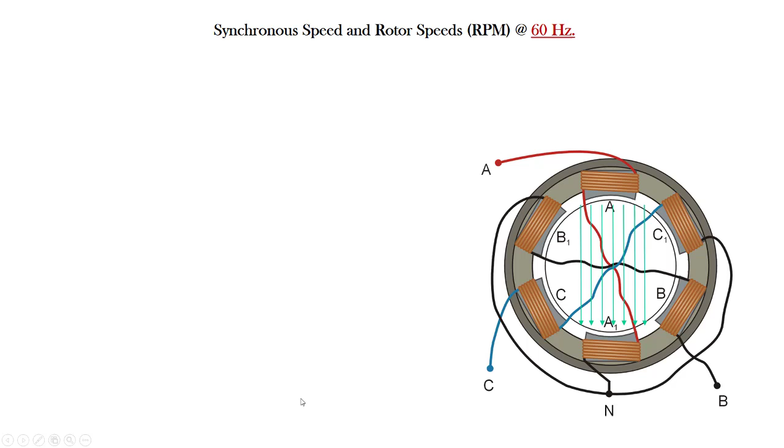The synchronous speed basically comes down to the speed of the rotating magnetic field. So here's a little picture of that. What's going on is that as each one of these phases is energized, and 120 degrees later, the next phase, it creates basically a rotating magnetic field. So we have this picture here drawn without the rotor.

So we can calculate the synchronous speed of a motor by taking the frequency of our supply, multiplying it by 120, and then we divide it by the number of poles. So that would be the formula to calculate synchronous speed. So let's just run through a few examples. So if we have a 60 hertz machine times 120, that's going to work out to 7,200, and we divide it by the number of poles.

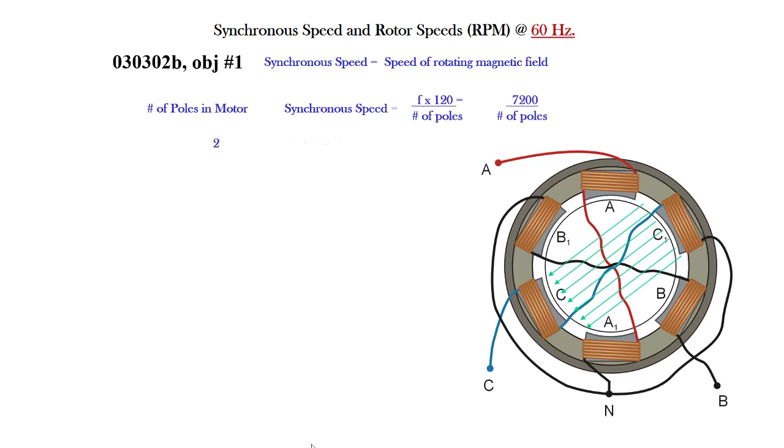So the number of poles of a motor always has to be an even number. So the lowest even number would be 2. So if we had a 2-pole motor operating at 60 hertz, we're looking at roughly 3,600 RPM. A 4-pole, its synchronous speed would be 1,800 RPM. 6-pole, 1,200. An 8-pole, 900. A 24-pole, 300 RPM. And what are some typical motor nameplate values for RPM?

So 1760, which would be a 4-pole machine. 3450, that would be a 2-pole machine. 850, that'd be an 8-pole machine. 1160, well, that would be a 6-pole. And 250 RPM would be a 24-pole. So we might see RPMs such as that on the nameplate.

So that's the full load speed of the motor, and when we see that, we'll know that it's a certain number of pole motor and it's going to have a certain synchronous speed. So for example, the 3450 RPM 2-pole motor, well, from 3450 we know that that must be a 2-pole, and its synchronous speed, or the speed of the rotating magnetic field, will be 3,600 RPM.

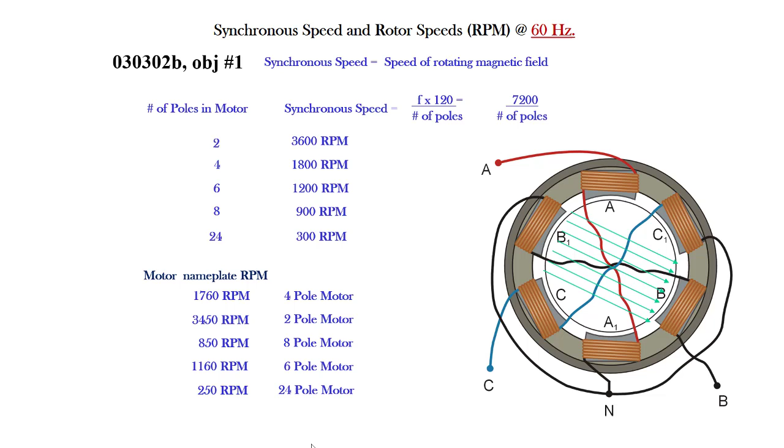So moving on, if we had 50 hertz machines, so this is European frequency, it's still the same thing, the synchronous speed, same formula, frequency times 120 over the number of poles, so 50 times 120, 6,000 divided by the number of poles. We're going to see a little bit different synchronous speeds on each one of these motors, or speed of the rotating magnetic field. Nameplate values might be something like this.

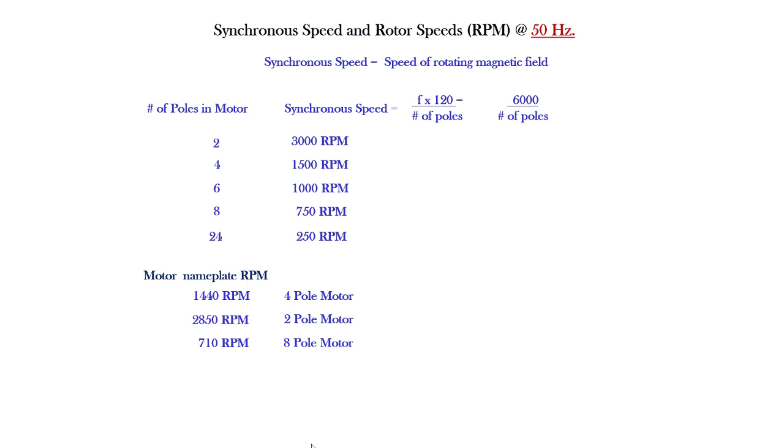So the actual full load RPM has always got to be slower than the synchronous speed. You can never be as fast as it, otherwise it wouldn't be an induction motor anymore. We would have something called a synchronous motor. So we're going to dive a little bit closer into the induction motor and what's happening in that rotor. And to do this, we've got to look at some rotor parameters and define some of the terminology that we're using.

So rotor speed would be the actual speed that the rotor is turning at whichever point in time. The rotor is connected to the shaft, and so in our picture here on the right, it's the gray part, and the rotor bars here are in red on your right. So rotor speed, how fast it's going. Rotor slip. Now, what is rotor slip?

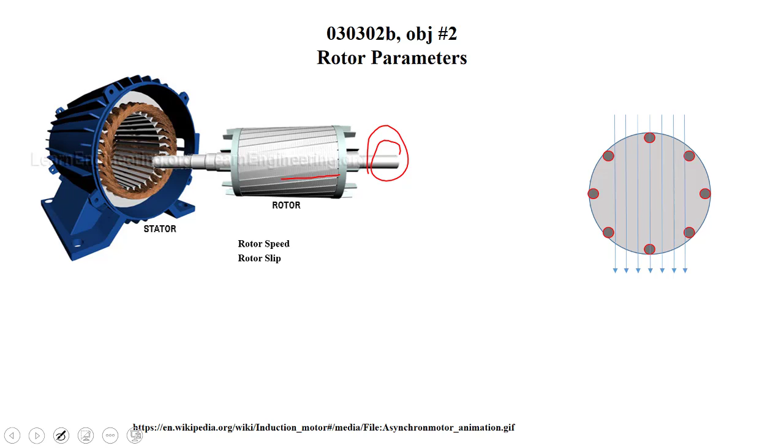Well, rotor slip, from our previous example, we had the synchronous speed of our machine, so N synchronous. And so if I subtract off the actual speed of the rotor, so this would be the speed of the rotating magnetic field, and I subtract off the actual speed our rotor is going, we call that the slip, or rotor slip. All right, so the slip of a motor is your synchronous speed, subtract the actual speed of the rotor, or the RPM the rotor is going.

Rotor voltage. Well, when we have a magnetic field that's rotating at a constant speed, like our synchronous speed, and then the rotor sitting there in the middle, what's going to happen is we induce a voltage on that rotor. And as that starts to speed up, that rotor voltage begins to change. It doesn't get cut at the same rate anymore.

So the rotor voltage, we say it's a blocked rotor, means the rotor is not moving, or 100% slip. And so we'll get our maximum induced voltage at blocked rotor values. As that starts to speed up, the rotor starts to accelerate. Now the rotor is not getting cut as fast, and the slip starts to decrease. So the induced voltage on the rotor starts to decrease as well.

Once we have an induced voltage on that rotor, current's going to start to flow. So it'll flow through these rotor bars, go through the end rings, come back on the other side, and back through the end ring on this side. So it's basically like a short-circuited transformer. And at blocked rotor, if I were to block that rotor and not allow it to move and turn the supply voltage on that stator to create the rotating magnetic field, it's just like having a short-circuited secondary transformer.

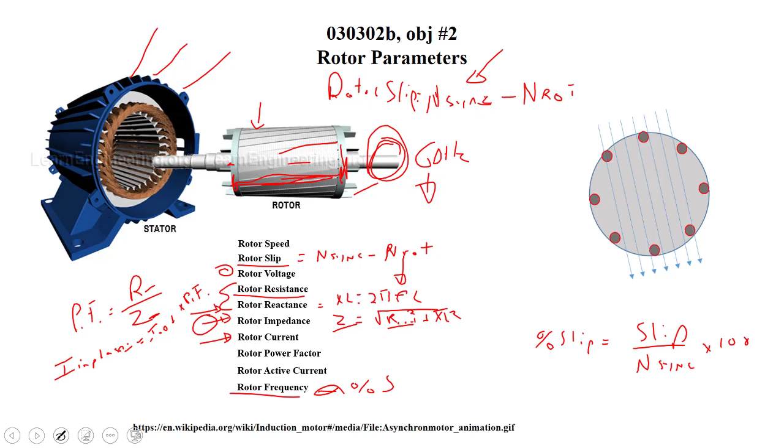As this rotor starts to accelerate, well, now the percent slip is decreasing. So at blocked rotor, we're at 100% slip. And now that the percent slip is changing, because the rotor is starting to accelerate, our voltage starts getting reduced, our reactance gets reduced, our impedance starts to reduce, our current will come down, and our frequency will also start to come down. And we can see that as it catches up, all those variables that are directly proportional to the percent slip are going to start to get adjusted to the percent slip. This one is also proportional to the percent slip.

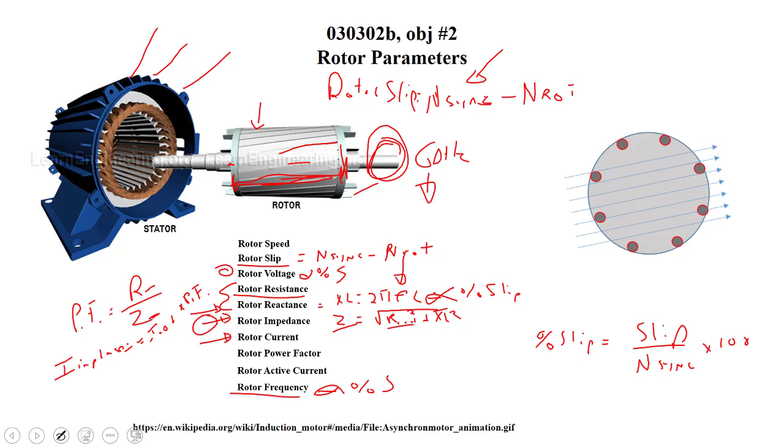All right, so what's really going to help make sense is once we get through something called a rotor chart. And that's what we're going to do next. We're going to look at a rotor chart. So in our case here, we're going to have a 60 Hertz motor. It's a 4-pole motor. And so we could calculate its synchronous speed. Frequency of 60 times 120 divided by a 4-pole motor, so 4. Synchronous speed is 1800 RPM.

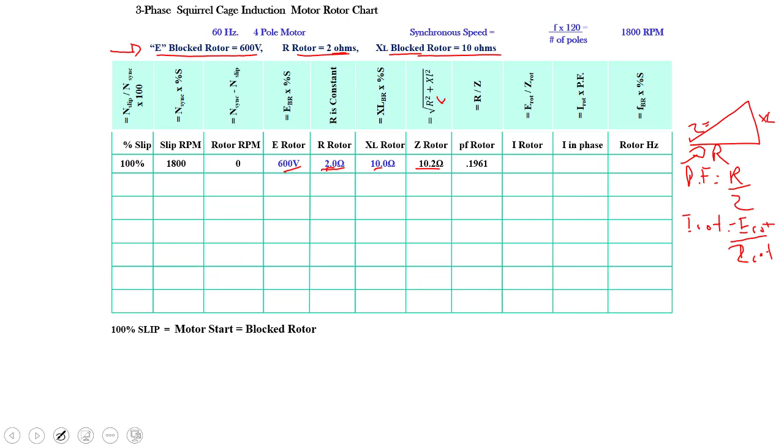We take our voltage of our rotor, and in this case it's at 100%, so blocked rotor, and divide it by the impedance of our rotor at 100% slip, or blocked rotor. So 600 divided by 10.2, current in the rotor is 58.82 amps right now.

So if we had to convert this over to a current triangle, well, we know the power factor is 0.1961. The I of the rotor, basically the I total of the rotor, is 58.82. So if I multiply my I of my rotor times my power factor, I'll get the in-phase component. So I of rotor multiplied by power factor, 11.53. That's our active current in our rotor.

The frequency, well, the rotor's not moving. And the supply frequency, or the primary from the stator, just like the primary of a transformer, it will induce the full 60 Hertz on the secondary, which is our rotor. So that's how we complete the first line on our rotor chart.

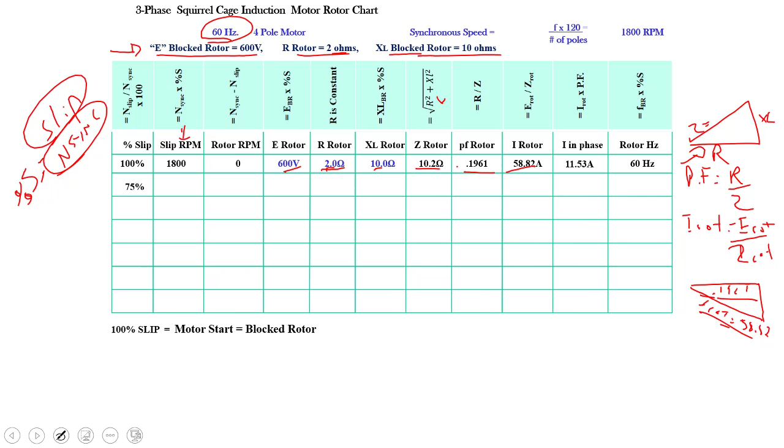Let's go ahead and try this out at 75% slip, and let's see what values it affects as this rotor starts to increase. So first off, we're going to determine our slip speed, or our slip RPM. So if you remember, our percent slip would be equal to slip divided by synchronous. Okay, so if I want to know what the slip is, all I do is multiply my synchronous speed times my percent slip. What's my synchronous speed? 1800. 1800 times 0.75 is 1350.

The rotor RPM, well, that would be taking your synchronous speed and subtracting off your slip. That's 450 RPM. If we add the two together, it's got to equal our synchronous speed. All right. So 1350 plus 450 is the synchronous speed. What would be our rotor voltage? Well, the flux lines are not cutting this rotor as fast anymore. The rotor's starting to catch up a little bit. So the rotor voltage is directly proportional to our percent slip. So E blocked rotor times percent slip. 0.75 times 600, 450 volts as the rotor's at 75% slip, or 450 RPM.

The resistance, well, that stays fixed. It doesn't change on a squirrel cage induction motor. The XL of the rotor, it changes. It's proportional to the percent slip as well. XL blocked rotor, or 100% slip XL, times whatever percent we're at. So 75% of 10 ohms, 7.5 ohms. The impedance of the rotor, R squared plus XL squared, square root, 7.76 ohms. Power factor, R divided by Z. So right now the rotor is running at a 0.2577 power factor.

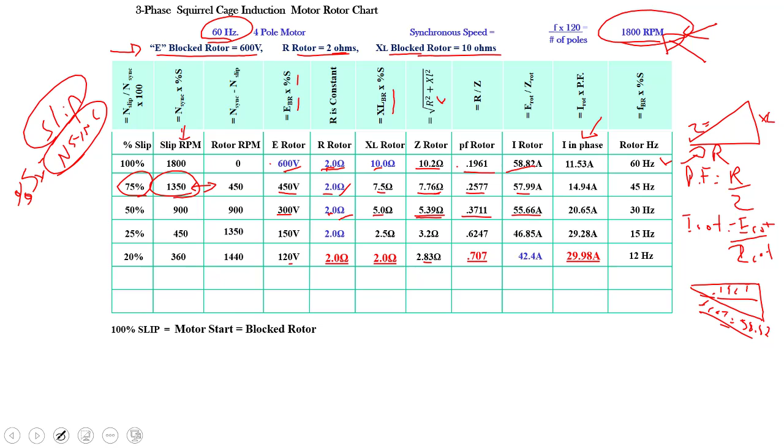So I of the rotor, well, our reduced voltage is 120 divided by Z. We're at 42.4 amps. And then the in-phase component, 42.4 times 0.707, 29.98. Still going up here, the in-phase component. Frequency, around 12 hertz. Now we're going to look at where we'll operate a motor. And this is just approximate. It's around 2 to 5% slip. So in this case, we're going to say that in our motor, 2% is the full load RPM.

So what does that put our slip at? 2% times 1800 sync, 36 slip at full load. The rotor RPM, 1764. So that'd be about its full load speed. That's what you'd see on the nameplate. Rotor voltage, 2% of 600, 12 volts. Resistance is still fixed. XL of the rotor, well, 2% of 10 ohms, 0.2 ohms. Okay, so we see the XL just keeps going down as it speeds up. It's directly proportional to our percent slip.

Z of the rotor, 2 squared plus 0.2 squared square root, 2.01. Power factor, R of rotor, 2 ohms, divided by the Z of rotor, 2.01. We're at 0.995. I of rotor, 12 volts, divided by the Z of rotor, 2.01 ohms. 5.97 amps. In-phase component of that 5.97 amps, well, times that by 0.995. Our active current, or in-phase current, is 5.94, and frequency 1.2 hertz. So that'd be around where we'd operate the motor, about our full load.

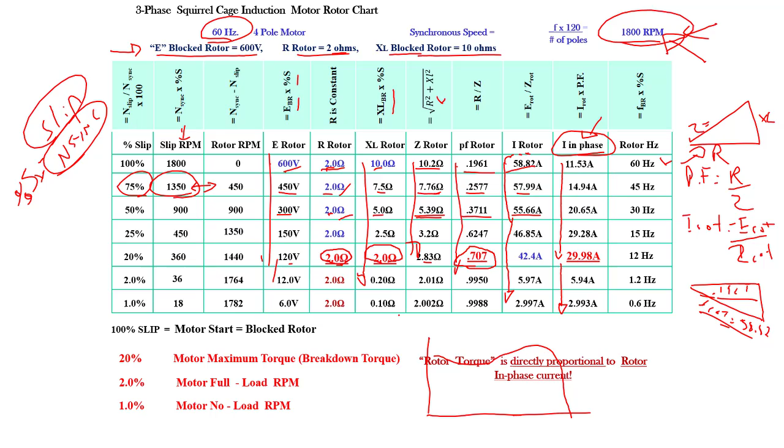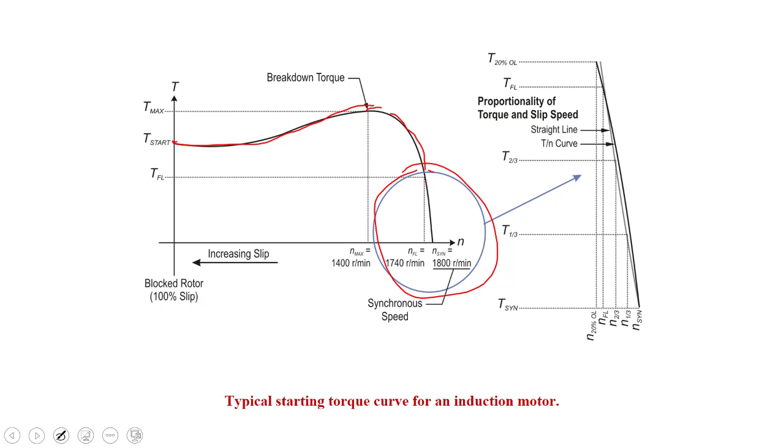Okay, so a motor can never reach synchronous speed, not a SCIM anyways, not a squirrel cage induction motor. So it always has to have a little bit of slip in order to induce a voltage and create that torque. It needs to rotate the rotor. So this is a blow up over here on the right hand side. So running it at 1/3 of its horsepower or load, we're going to be running it right around here. 2/3, we're going to run it about there. At full load, we're going to operate the motor about right there.

As soon as we go past full load, we start overloading it. Okay, and so that would be right about here. And so if the overloads didn't trip out at this point, we could continue loading this motor up, and it's going to continue to try to produce that torque that it needs to move the load until we get to this peak torque. If we reach that peak torque by loading that motor up too much, we will stall that motor and lock that rotor up.

And then it's basically like having a short-circuited transformer. That rotor is not moving at all. And we're going to have a huge high current flow through the primary, through the stator windings. Chances are, if that breaker doesn't trip, that motor is going to burn up. There will be way too much current and way too much heat going through it. That motor would have to be inactivated as soon as possible.

And sometimes it's hard to trip those breakers. We size overcurrent for motors quite high, 250, 300% of their full load amperage. That much current flow, sustained for too long, would definitely burn it up. So yeah, that's what's going on in the induction motor.